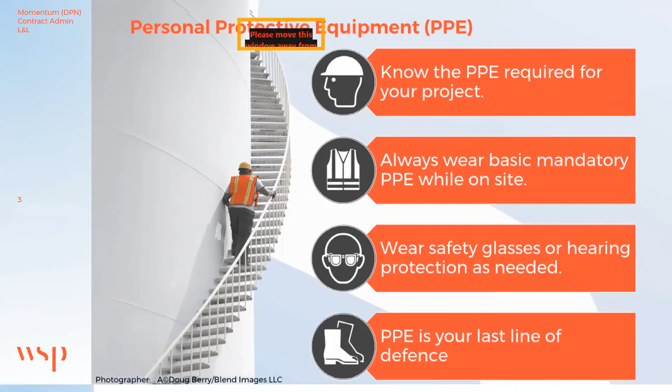At WSP, in how we approach health and safety, we have a few protocols that we do for all our staff who go to site. We have something called a PRAS, which is a project level risk assessment that we need to fill out. That's more of a general scope of the project, and it identifies all the hazards that you'll encounter for the project. It also identifies who's participating in the project and what they need in terms of training regarding health and safety.

We have our field level risk assessment. That's more like every day, every time you go to a site, you need to fill one of these out. And then we started going online with safety apps, which are similar to the field level risk assessment, but it's all online, covering safety work practices and procedures. Basically, you're doing your WHMIS, and if you ever need a machete, you put that down.

I think those examples, Adriano, just go to show WSP is a large company, and there's a lot of different risks that we can be exposed to. So WSP does a great job identifying all kinds of different risks we might face and how to deal with them when you're on site.

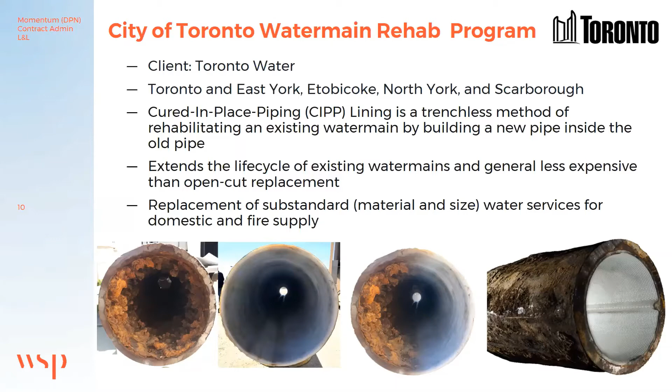We had 9 active contracts and over 40 active construction sites. The total construction value since this program was introduced in 2015 is over $300 million, which equates to about 175 kilometers of water main replacement since 2015. We work closely with our engineering team at WSP. We have field ambassadors who are planners that deal with the public, and of course the Toronto Water PMs and transportation with the city as well.

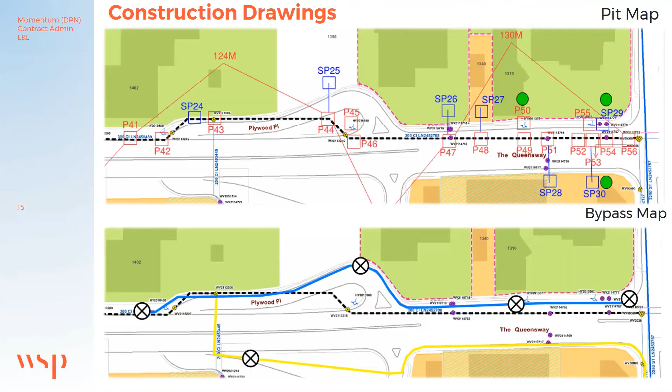As I mentioned earlier, we have to work with transportation since we are working on city streets in Toronto, and how we manage our traffic in the city is very important. Traffic in Toronto is a big topic, so we make sure we're doing our best to keep traffic flowing smoothly during our work and keep the public safe. So how we do that is reviewing the OTM Book 7, Ontario Traffic Manual, and we work with transportation and the contractor to develop traffic plans that are agreeable and get the contractor on the road safely.

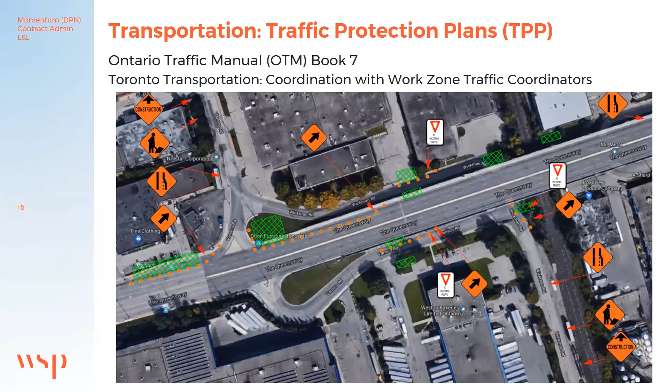For the water main structural lining, it's kind of like a factory process. Here's a listing of the steps, and it generally goes in this sequence, though you can start the next step before completing the other. I'm going to go through each step in this list and describe what the process is briefly.

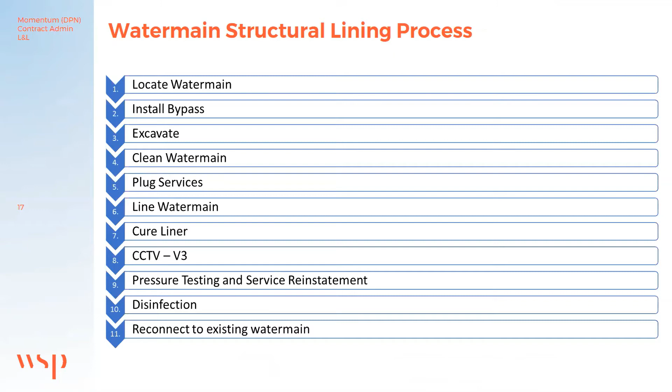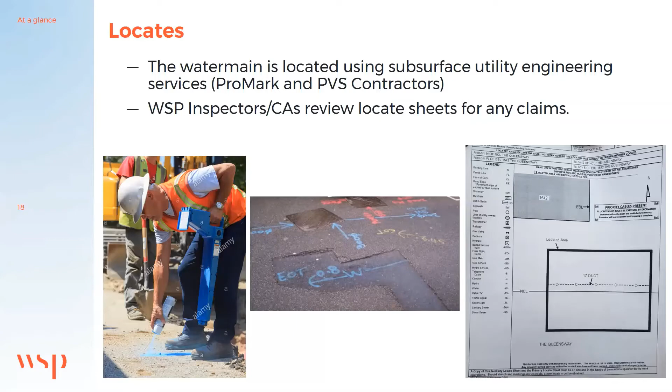First we start with locates. Before you dig, you need to figure out what's underground. So before the contractor starts excavation work, they get locates done, typically by two companies in Toronto, ProMark and PVS Contractors. They provide the contractor with any hydro, gas, or other utilities of reference underground, and the contractor uses this to make sure the excavations are safe. Toronto always has lots of stuff underground, so it's always interesting to see what you find.

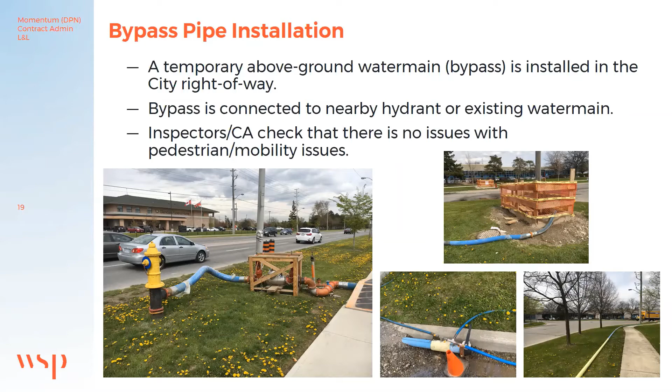Next we move on to bypass piping. As I mentioned before in that drawing, we use a bypass system, which is essentially a temporary water main on the surface. Since we're working on the existing water main underground, we have to turn it off, and to make sure people still have water supply during the project, which normally lasts a few months at least, we use the temporary bypass. You can see some pictures showing examples of connections to the temporary water services. The bypass supplies water temporarily to businesses and residential homes, either underground or directly through their hose bibs on the side of houses. It's also chlorinated the same way the water main would be, so it's the same type of water quality.

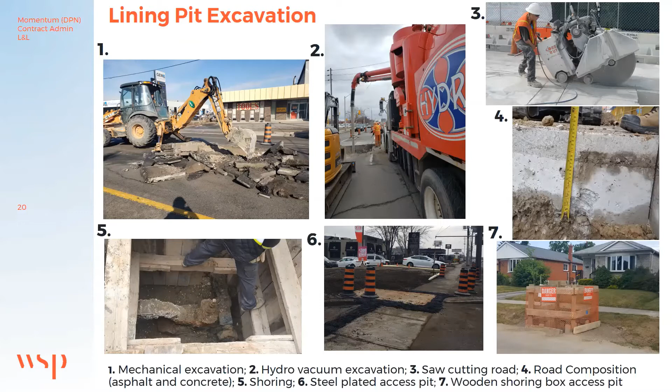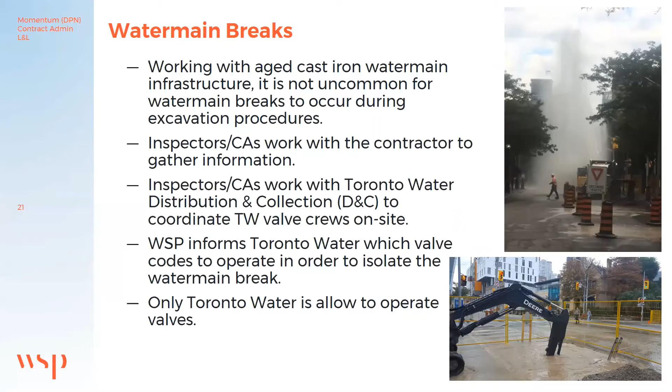All right, and then cleaning. So once the excavations are done and the water main has been turned off and everyone's connected to the bypass system, the lining procedures can commence. So the first step is cleaning. The contractor uses several different methods to clear out the debris you saw on the old pipes in one of the first slides. They use different methods, like a scraper, or water pressure to clear away all that old iron and try to get the circumference as circular as possible before they start the lining installation.

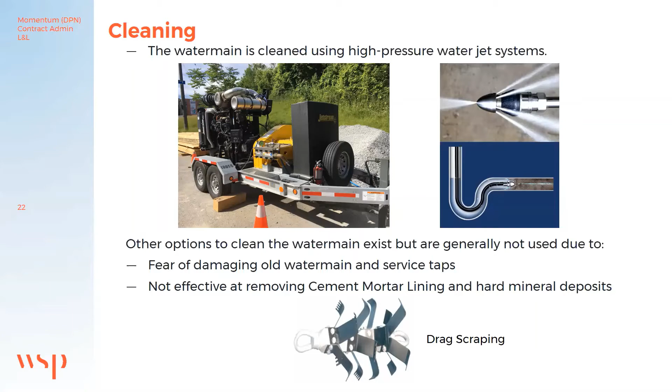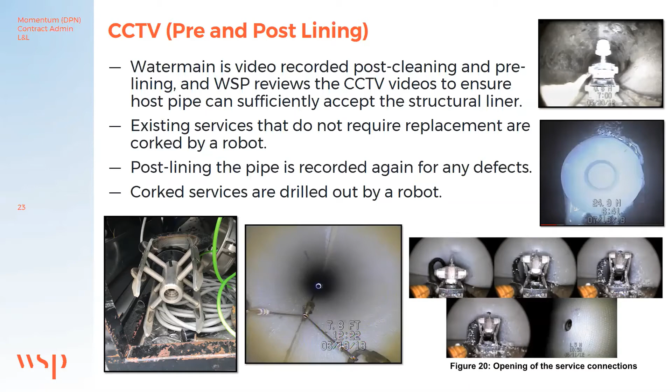And that brings us to the meat and potatoes of our project, the actual liner installation. Typically the liner is installed through access pits, going from one pit to another through the dead water main. The pits are usually about 100 meters apart, so they install the liner in about 100-meter segments. To install it, they pull the liner from one pit to the other using a winch, and while pulling it through the pipe, they inject an epoxy resin into the liner.

Once the liner is fully pulled through and put into place, they inject the resin and use boiling water pressure to push the liner into the shape of the existing host pipe. Through the boiling water, the resin reacts chemically and goes into the fabric of the liner, causing it to harden and create the shape of the host pipe. That liner is graded structurally the same as PVC. So you essentially have a new water main inside the old one, which should last another 40 to 50 years, doubling the life expectancy of a typical water main.

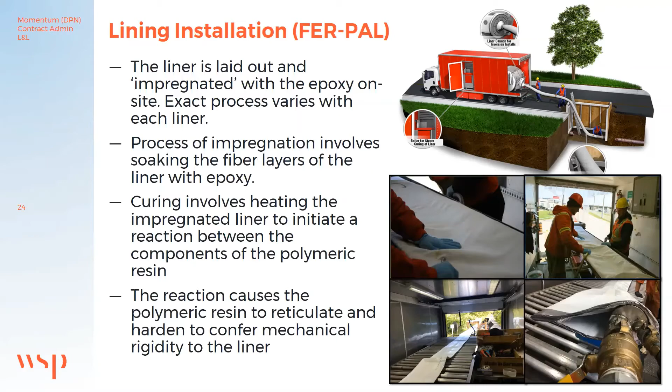Part of our work isn't just upgrading the water main, we're also upgrading the side branches - any hydrants or services from the water main to the property line that are substandard. That also includes all the parts of the water main along it, like valving and installing PVC in the access pits once they're completed. Our part as contract administrator and inspectors is to make sure everything is installed properly per the city's standard drawings and specifications, ensuring the city gets the product they're paying for, and that the contractor is working safely.

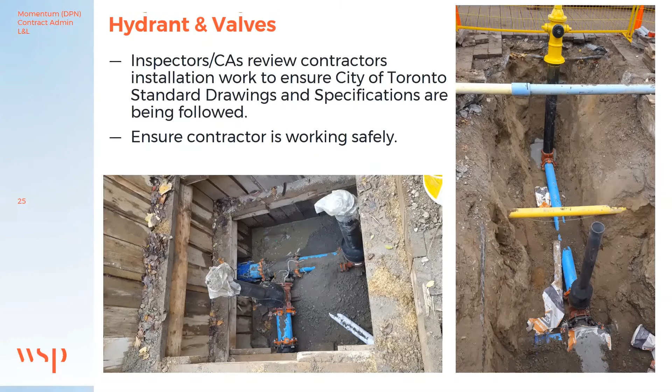And then of course, with water mains, chlorination is very important - making sure everyone's getting clean water. We do disinfection of our bypass system as well as the water main, all done under the same regulations as the MOE for typical PVC water main. We use different sample points for all of our side branches - usually every large service or side street gets a sample point, and those results get sent to a lab. If we get passing results, we can tell the city the water main is good to turn on and reinstate.

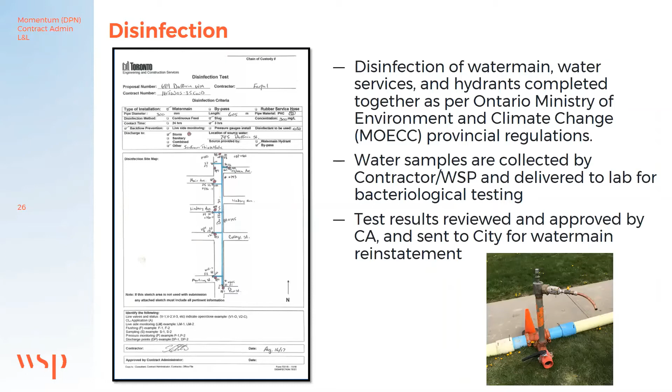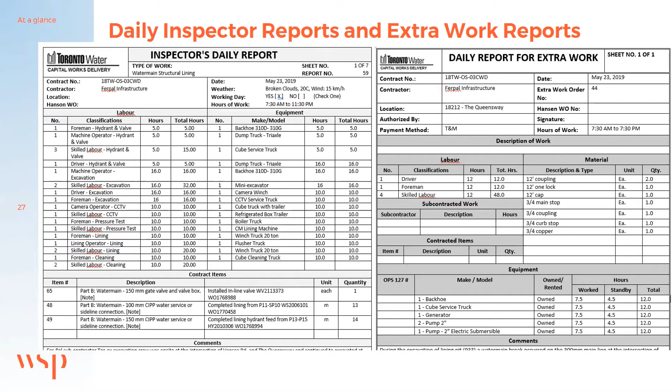And then once we get near the end of our projects, we do our final inspections and holdback releases. So typically for contracts, there's a 10% holdback to try and ensure that the contractor is actually delivering on their promise of the contract. So once they've appeased all requirements, we can release that 10% holdback, and we use the Construction Lien Act to evaluate if the contractor is within substantial completion. That's just a calculation they use to determine the value of work outstanding compared to the value of the contract. And then once that's satisfied, we can give them their holdback release, and then we enter a warranty period.

So any issues that pop up, typically 2 years after the project, the contractor is responsible for rectifying. And from the CA side, we do follow-up inspections and warranty inspections to make sure everything's okay.

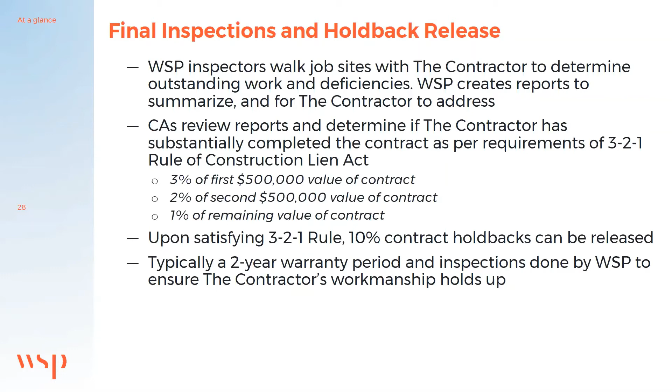So I'm just going to talk about and elaborate a little bit more about contract administration for land development.

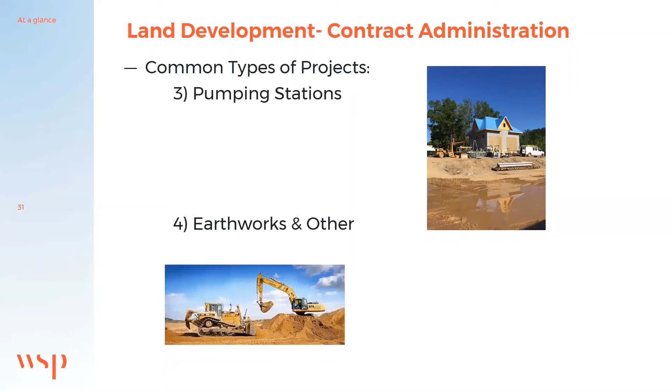We do earthworks as well, so a lot of stripping of topsoil and grading, as well as retaining walls. So we do some retaining walls as well.

So it's important, being on the field and in contract administration, that you have site awareness, which means you're going on site, you're going to be around heavy equipment, a lot of moving equipment. You want to be aware of your surroundings. You want to make sure you're making eye contact with the operators. Always respect the machines, because obviously it could lead to tragedy.

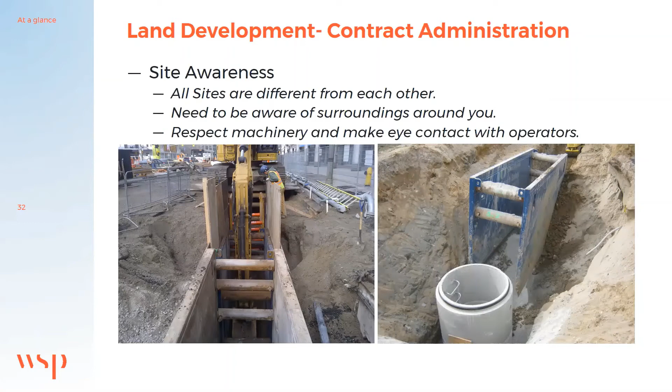So here, this is a typical open cut method for installing sewer and water main. Things to note: beside the trench boxes, it's not totally backfilled, so you want to make sure you have your railings on your trench boxes. Another thing to look out for is any linear cracking. You can see to the right of the trench box, about maybe 2 meters to the right, there's some linear cracking. That's an indication that the soil and earth underneath is caving in. So these are little things and tricks that you get familiar with while working on site.

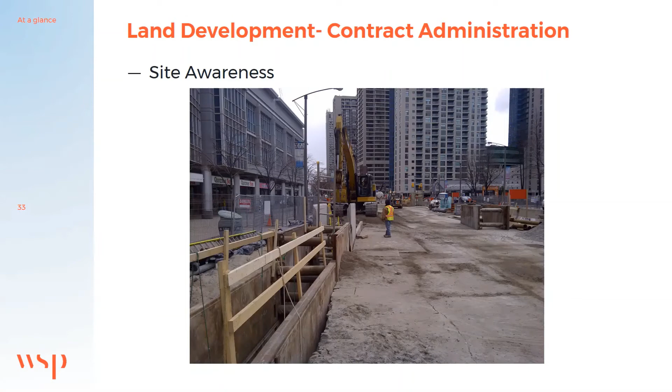Something that we do now in land development and contract administration is constructability reviews. Basically, the designers and our CA group communicate before a project is released for construction and tendering. We like to review drawings at second submission and then another review at the contract and tender drawings. These are two examples of constructability issues that could have been identified prior to the project starting.

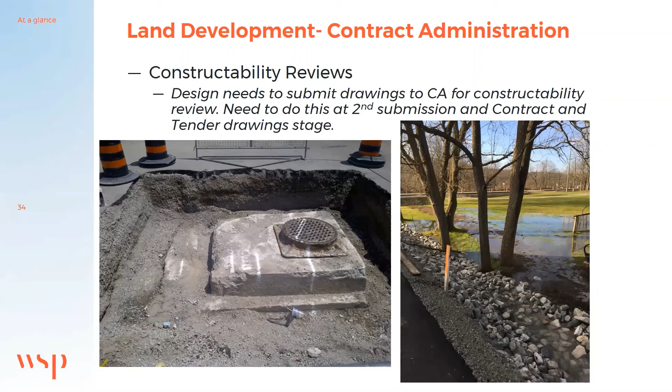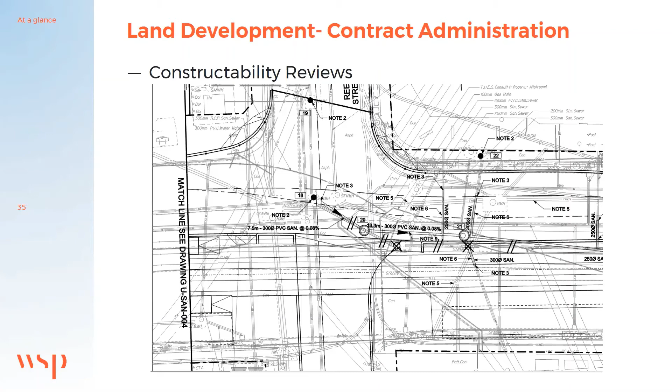You can see here an example of one of our projects downtown, and how complicated it could get with a lot of the existing infrastructure in the ground. To design a sewer and water main around all this, you have to take into account the heights of different utilities. Also, being downtown Toronto, I'm sure Dan could relate, there are a lot of unknowns that you don't know is there, things that the locators won't pick up, which you need them to pick up.

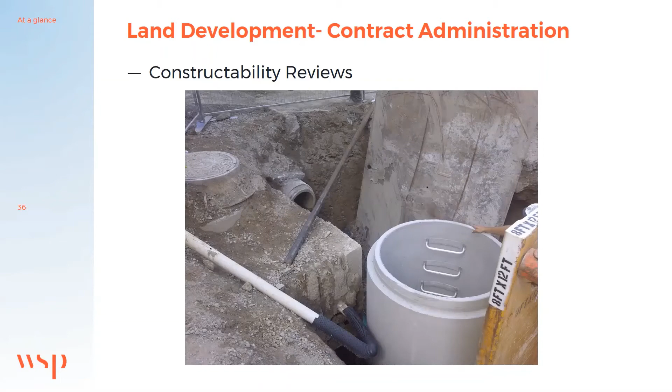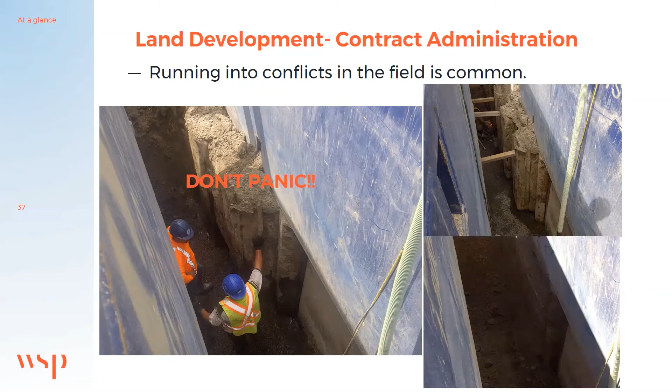Like I said before, you don't know what's in the ground. This is an example of one of our projects where we're installing a new sanitary sewer. Came across shoring pile or sheet piling, not expected to be there. So first thing you do, don't panic. The contractor is going to probably be looking for you and already hinting that there's going to be extras, which they're entitled to if it's unknown. But there's always a solution. In this case, we had the liners cut. There was nothing that they were supporting really, it was all backfilled. So they cut them out and then off they went to continue with the works.

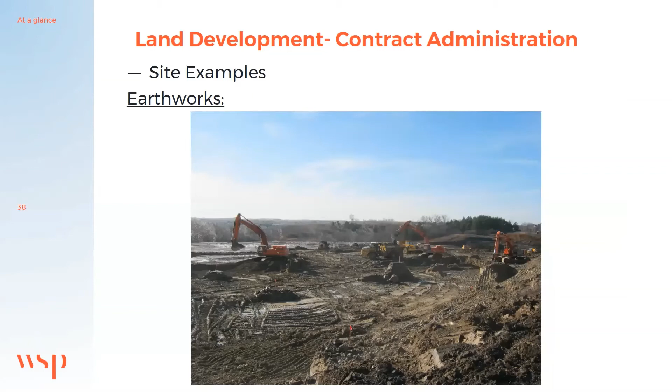Site example again, this is an example of earthworks. You can see how large the project is. There's lots of machinery on site.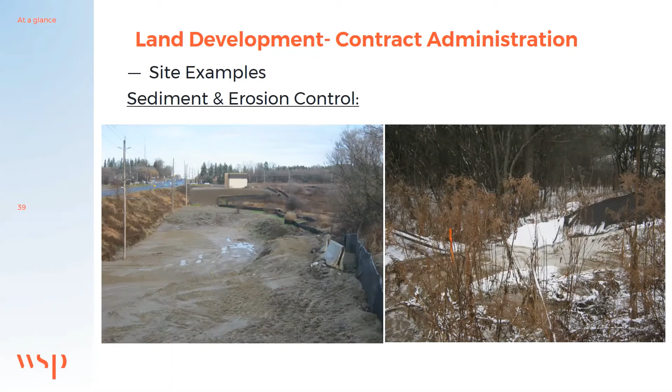Again, same thing with this. Stable slopes, basically with groundwater washing out, the water is going to find its natural path to flow. So you'll get some erosion on different slopes and swales, and you want to make sure the contractor takes care of this with stabilizing and filling in all the swales that are being formed.

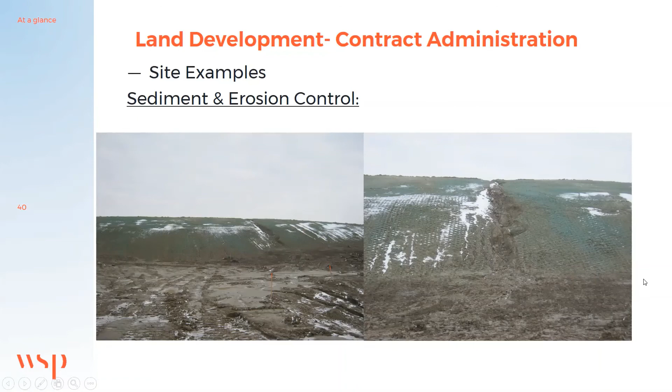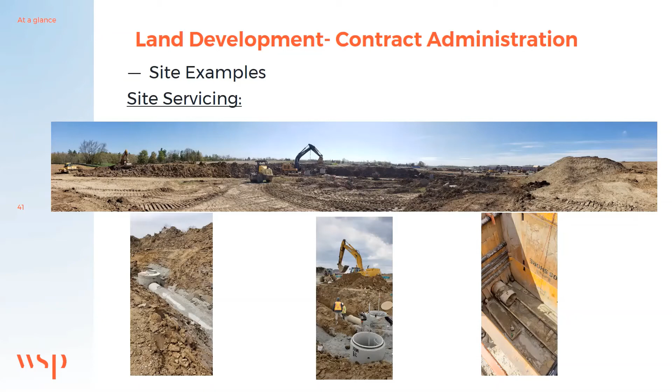Like I said before, this is an example of a retaining wall. I'm sure most of you might have done this experiment in university where you build a retaining wall out of toilet paper with sand. You'll see the tiebacks here.

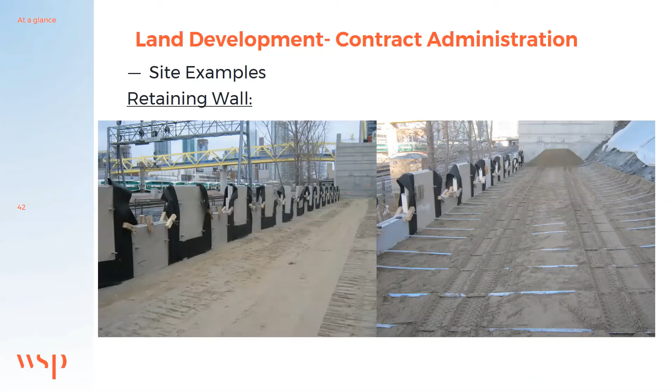We do noise barrier walls. You'll find these alongside highways and major railroad tracks.

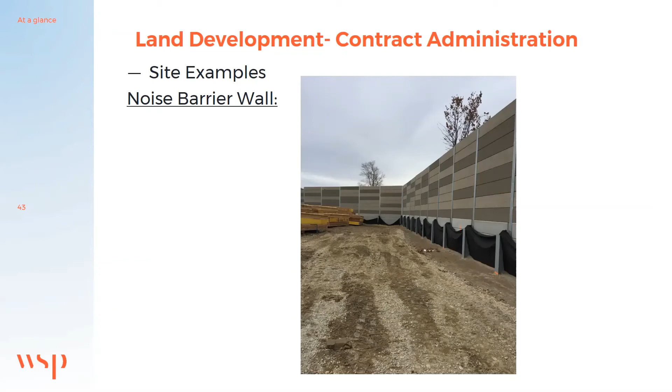We do airport works. This is a project at Toronto Pearson Airport. There's a new screening facility, so we deal with all the buildings and construction of the new storm and groundwater system.

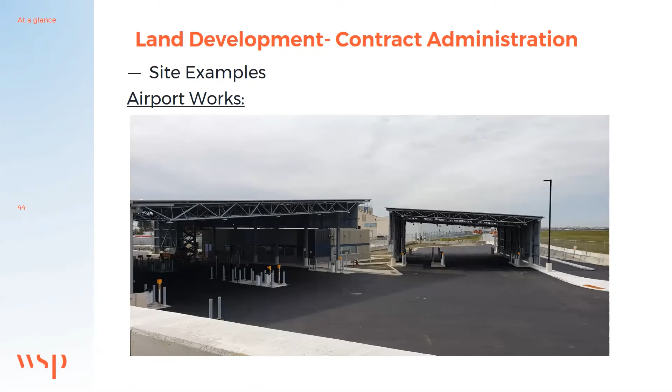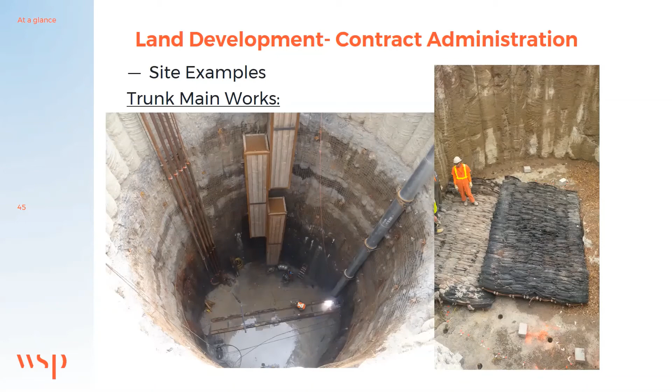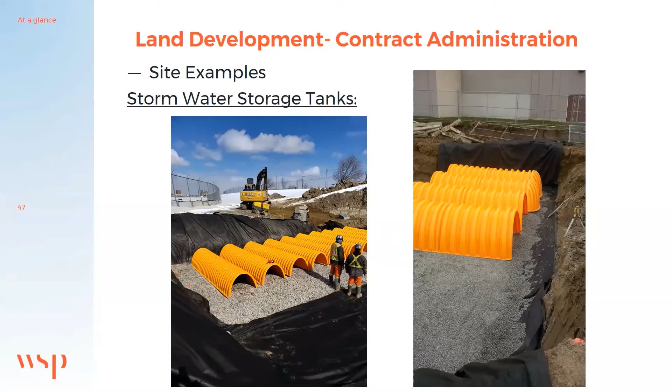We do a lot of top works as well, so a lot of sidewalks, base curb, then top curb, and a lot of parking lots as well.